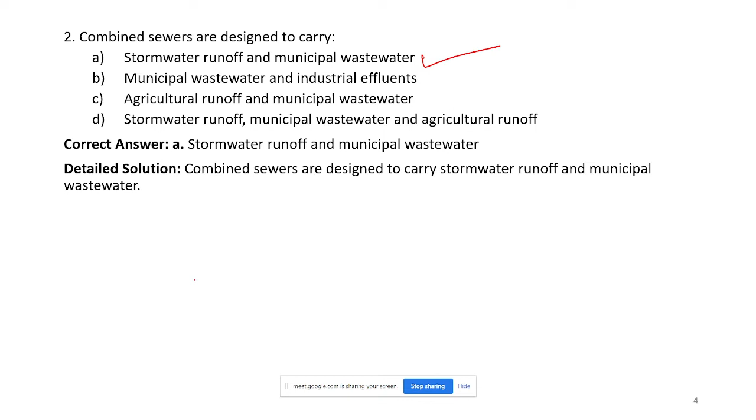Very good. Because, see, there are two types of sewer networks, and I think you would have learned about this in the lecture videos. You have combined sewers where two types of flows are there: stormwater runoff and municipal wastewater.

So when we design a sewer network to incorporate both stormwater and municipal wastewater in a municipal region, that is known as combined sewers.

So anyone know what is the other type of sewer network which we have other than combined sewers? Separate sewers. Yes, that is correct. So other than combined sewers, we also have systems designed separately to incorporate municipal wastewater as well as stormwater. So these are the two types of sewers.

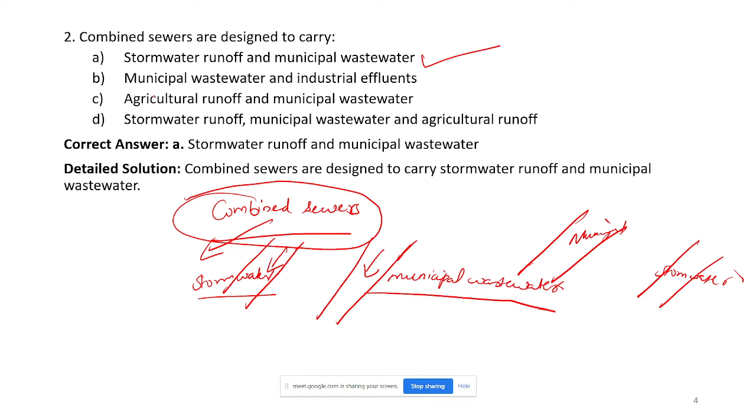So what are the other options? Option B is municipal wastewater and industrial effluents. But industrial effluents, when we take it, there is a possibility that these could be discharged into the sewer lines, but in effect it is not considered as a separate parameter for the design.

So for the design we consider two types of wastewater, stormwater runoff and municipal wastewater, and if it is going in a combined system it is called combined sewers. Similarly, agricultural runoff could also go into the sewer lines, but as engineers when we design, we basically consider these two types: stormwater runoff and municipal wastewater. I hope it is clear for you. Let us move on to the next question.

Ma'am, there is a doubt. In many textbooks, there is a saying that stormwater and agricultural runoff are both the same. They have taken both together, and sir has taught they are separate. Separate, yes. So I will tell the reason.

See, stormwater runoff means if you have a municipal region and it is a rainy season, a wet weather season, the runoff from that region is called stormwater runoff. But agricultural runoff need not be in a wet weather season. It could be a dry weather season also.

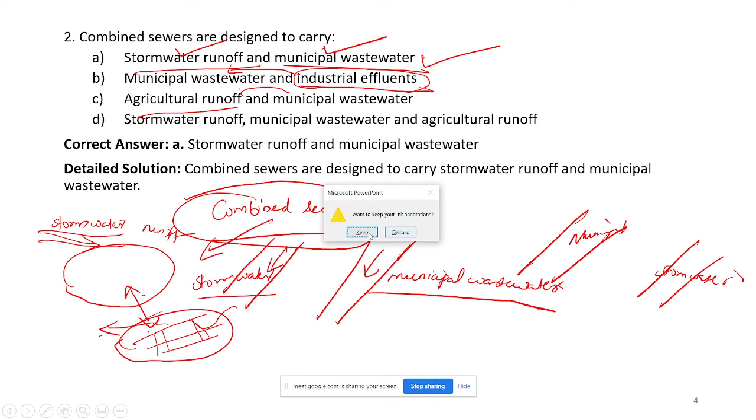Let us come back to the third question. Which of the statements are true? A, dry weather flow depends on weather conditions and infiltration in the sewers. B, dry weather flow undergoes fluctuations. C, combined sewers carry stormwater runoff and municipal wastewater. D, all the above. So, any answers, any guess?

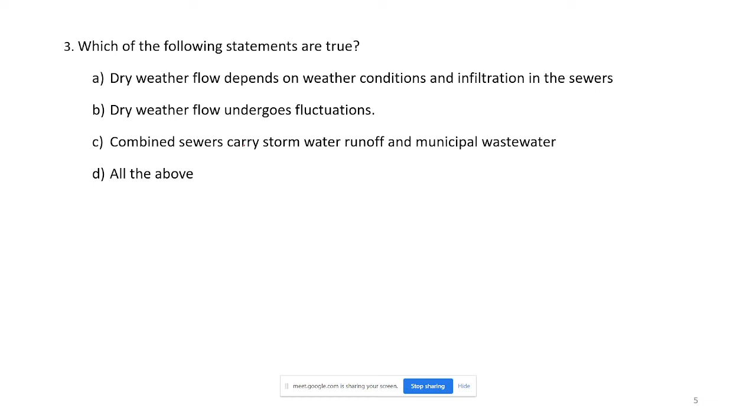Option D, ma'am. Option D, which one? Option C. Option C, okay. Let us see the answer first. The correct answer is option D, all the above. The question is which of the following statements are true. So let us see the first option.

Dry weather flow depends on weather conditions and infiltration in the sewers. This statement is correct because when it is not a rainy season, whatever flow is coming through the sewers is known as dry weather flow. So obviously it depends on the weather conditions, and there could be some infiltration into the sewers which we should account for. You have learned about infiltration in the additional flows into the sewers topic in the week 2 lectures. So this statement is true.

Option B is dry weather flow undergoes fluctuations, which is also correct because based on the use pattern, the characteristics of the population, the variations in the infiltration, everything, dry weather flow can undergo fluctuation. So this statement is also correct.

Option C is combined sewers carry stormwater runoff and municipal wastewater. That is a true statement; we have seen it in the last question. So all the statements are true, and the answer is D, all the above. I guess it's clear for you now. So let us see the next question now.

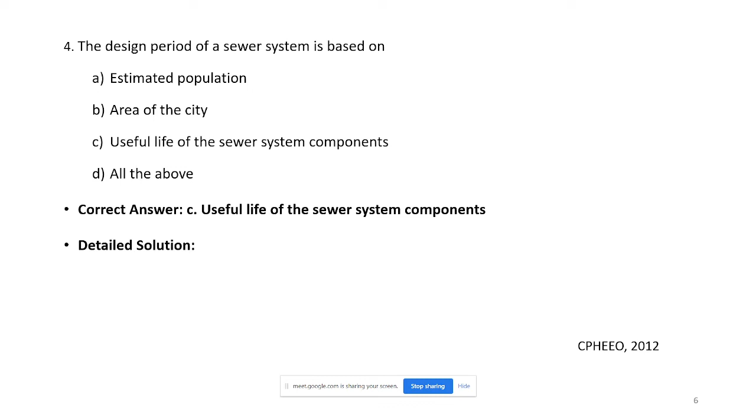The answer is option C, useful life of the sewer system components. Let us see why. We have seen in the lecture that for designing a sewer system, the most important parameter is the useful life of the sewer system components. Design period is always based on the life of sewer components.

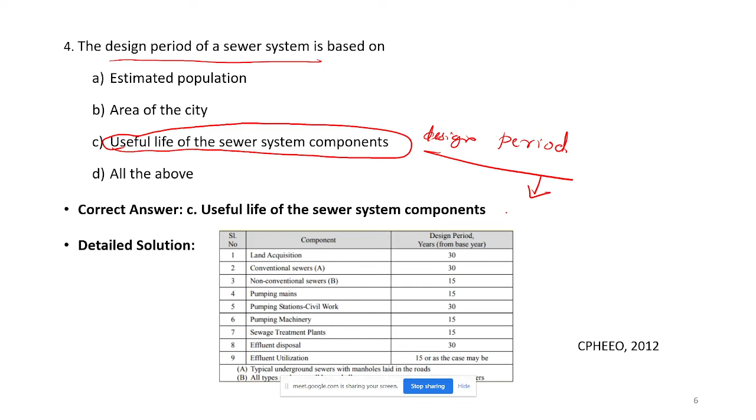The CPHEEO manual has given a table, also in your lecture notes, giving the life period of different sewer components. Based on these values we decide the design period of a sewer system.

The area of the city and the estimated population come into the picture when we design the quantity of sewage to be treated in the treatment system. The design period is always based on useful life of the sewer system components. I hope it is clear now. If you still have a doubt, kindly refer to the lecture notes.

As well as, there is a separate, I think lecture 2 or 3, in which the professor has discussed the design period of a sewer system. So any doubt on this?

Ma'am, what is the life of a sewer pipeline? Sewer pipelines, that I am not sure about now. I guess it is also given in this manual, so you can refer to this. Otherwise, I will clarify it in the next class. Okay, ma'am. It's all based on the manual; this manual is what we follow for knowing the life period of different components.

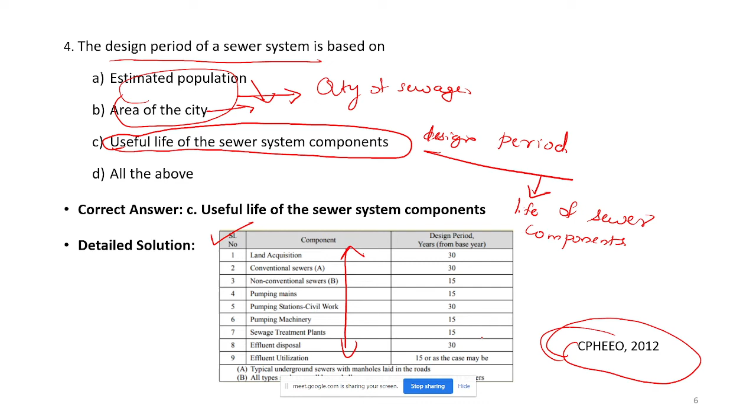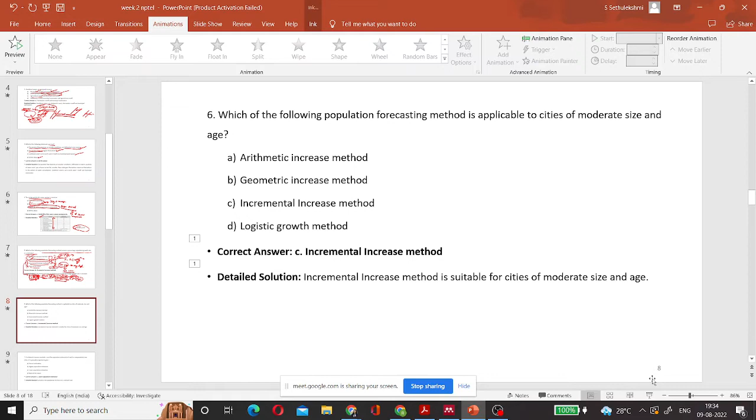Next question is which of the following population forecasting method is applicable to cities of moderate size and age? Option A, arithmetic increase method. Option A, ma'am. Let's see all the options. Option B, geometric increase method. Option C, incremental increase method. Option D, logistic growth method. You have said option A, right? Anyone else? Any other answers? Let us see the answer.

It's option C. Option C is the correct answer. For cities of moderate size and age, it is incremental increase method. Option A is correct for old and established cities where there is not much scope of further expansion. As we have discussed, option B is for new cities. Option C for cities of moderate size and age.

In the example, the professor solved one problem with these three methods, and we have seen that option A gave the smallest prediction, and option B predicted population at a very high scale, and option C, with incremental increase method, the value was in between. So this was seen in the example problem solved in the lecture video. So I guess it is clear for you now. So is there any doubt?

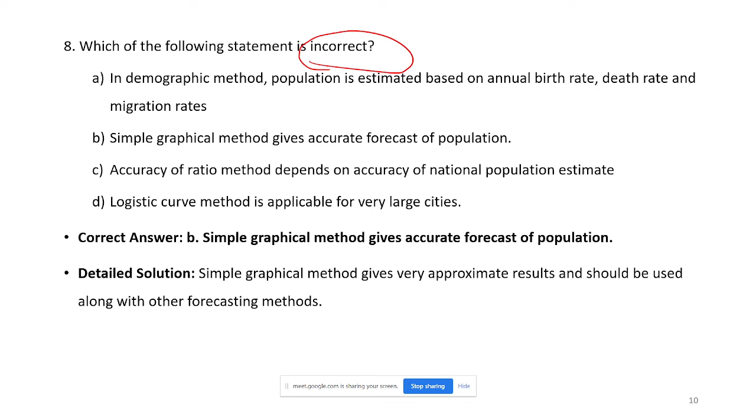Which option is incorrect? B. Option B. Any other lead? Anyone? Option B, madam. Option B. Okay, let us see the answer. Option B, yes, very good. Option B is the correct answer. Simple graphical method does not give accurate forecast of population.

You would have seen how the simple graphical method works. If not, kindly refer to your lecture video and lecture notes and see how they are interpreting the data and how we are predicting the population based on the simple graphical method. So this method does not give accurate forecast of population. It gives very approximate results and should be used along with other forecasting methods.

So I hope it is clear for you. Is there any doubt? Is there any doubt? No, ma'am. If not, let us see next question.

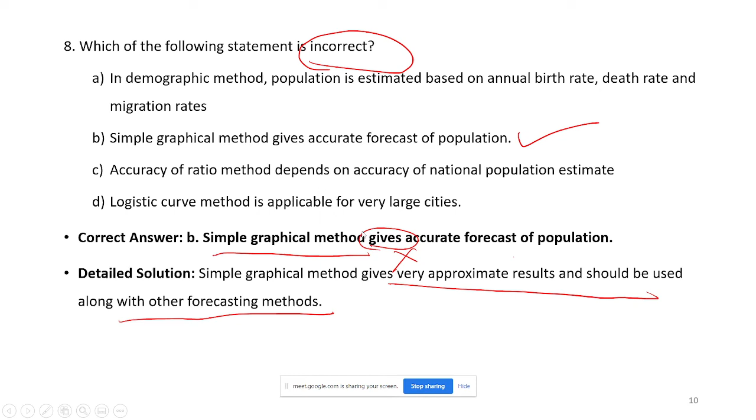Meanwhile, let me admit some of your friends again. Sorry for the interruption. Let us see the next question.

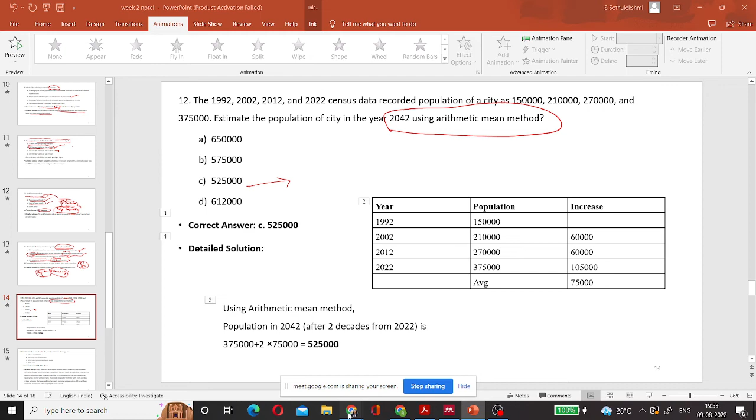Okay, let us see the answer now then. I hope you would have done it by now. Option C is the correct answer. Very good. So let us see the detailed solution. So you have for year 1992, 2002, 2012 and 2022 the population given, and I will explain how this method works.

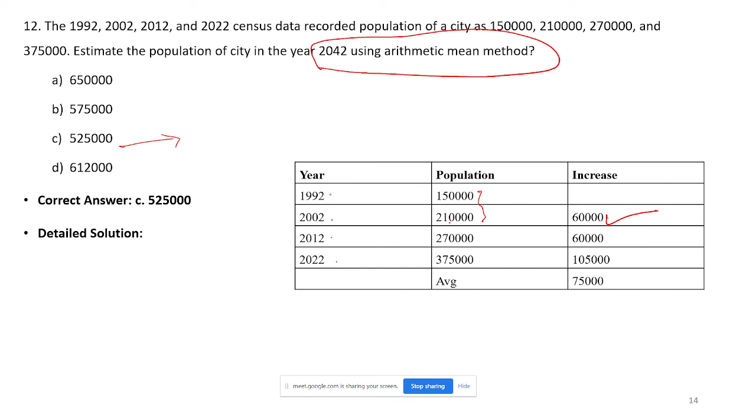So what you have to do is, from 1,50,000 to 2,10,000, the 60,000 is the increase. Then from 2,10,000 to 2,70,000, again 60,000 is the increment. Then you consider these two, and here 1,05,000 is the increment from the year 2012 to 2022.

So in this method, after calculating the increment from one year to another, or from one decade to another, you will have a table of increments, and from this you have to calculate the average. So this 75,000 is the average of these three. Then once you get this average, you have to calculate the population in 2042.

2042 means the latest data is available for the year 2022. So 2042 is 2 decades after 2022. So what you have to do is take the population in 2022 plus 2 into this average value 75,000. So that gives the answer 5,25,000. Hence, option C is the correct answer.

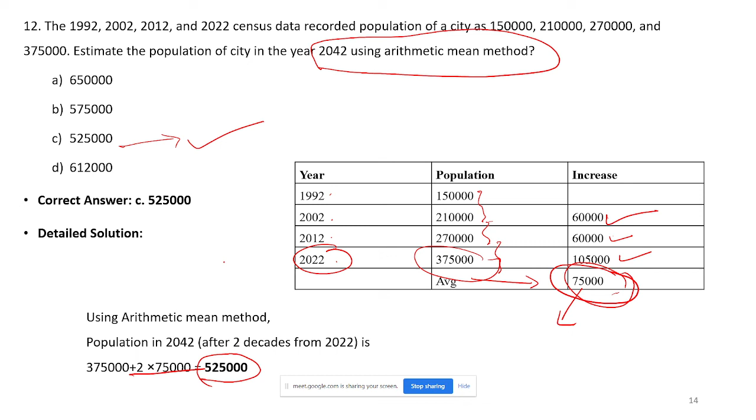So this is what I have said. In the arithmetic increase method, the population growth is considered as a constant. So this is the 75,000. This method assumes that the 75,000 increment will be there after each decade. So this is how this method works. I hope it is clear to you now. If there is any doubt, you can ask. If not, let us see the next question.

Next question is a theoretical question. Additional inflows considered in the quantity estimation of sewage are: A, inflow due to infiltration; B, inflow from commercial institutions; C, inflow from unaccounted private water supplies; D, all the above. Any guess? Option A, ma'am. Okay. Any other answers? Option B, madam. Okay. Any other guesses?

Okay, let us see the answer. D. Yes, option D is the correct answer. You would have seen in the lecture video that while estimating the quantity of sewage, other than what we have estimated based on the design population, there could be other inflows into the sewer lines which should be accounted for while designing the sewer network. So let us see what the additional inflows are.

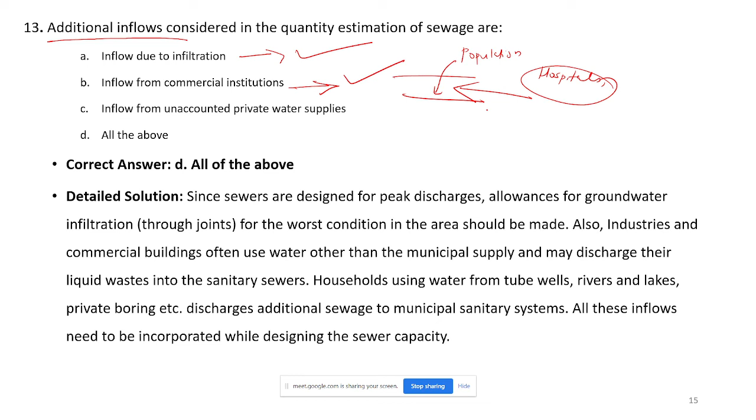Inflow due to infiltration, obviously it would be there. The second option is inflow from commercial institutions, like hospitals, schools, etc. Those things have to be taken care of, so that is also there. Then inflow from unaccounted private water supplies, which means that, suppose in a municipal region, we know the quantity of water which we are giving into the municipal area.

Some of the residences would be using bore wells or something else to get more water, so allowances for groundwater should be there. These things should be accounted for while estimating the quantity of sewage. Hence, all these three are correct, and so the answer is D, all the above. So, any doubt?

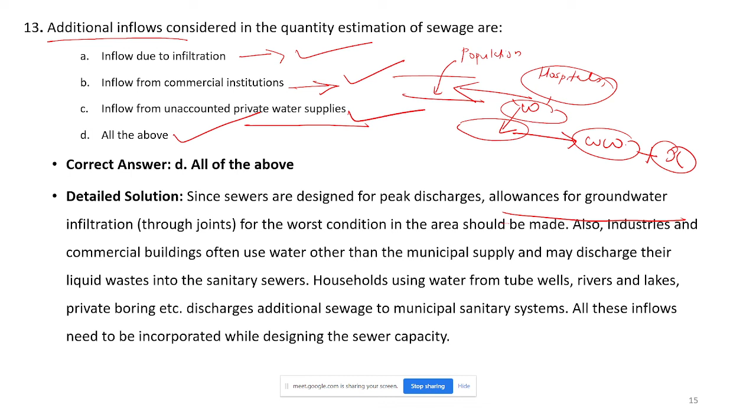Any doubt, anyone? If not, let us move on to the next question. So the next is a problem. I expect all of you to do this problem now and say the answer.

The question is, if the development plan rules of a city provide following reservations for different land uses: roads 14%, gardens 12%, school 4%, and markets 3%, calculate the population density per hectare for the plan. Assume floor space index as 0.5 and floor area as 12 meters square per person.

Option A 119, option B 289, option C 279, option D 256. So you have to estimate the population density per hectare for the plan. I hope a similar numerical was solved in the lecture video. So all of you please solve it now and say the answer. I'll give you a few minutes.

Option A 119, madam. Option A 119. Okay, any other answers? Any other answer, anyone?

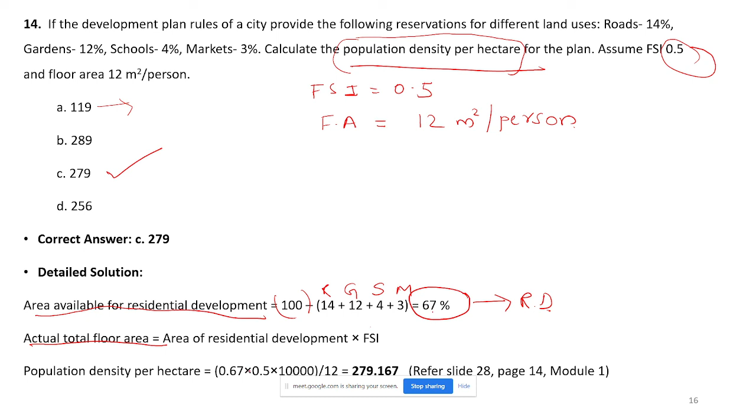Total floor area available for residential purpose: even though 67 percentage of the total area available is for residential development, we have to consider the floor space index for actually building the residential area. So we need to multiply the floor space index with this 67 percentage. So 0.67 into 0.5 is the actual total floor area available for residential development.

So we have been asked to know the population density per hectare. We know that 10 raised to 4 meter square is 1 hectare. So 0.67 into 0.5 into 10 raised to 4 is the total area available, in meter square, for this residential development purpose in 1 hectare.

And we are told that floor area of 12 meter square is occupied by one person. So we have the total area available as 0.67 into 0.5 into 10 raised to 4. This much area is there in our hand for residential purposes, and we know that 12 meter square area is occupied by one person. So this area divided by 12 meter square per person comes to around 279 persons per hectare.

1 hectare is equal to 10 to the... sorry, no, 1 hectare is equal to 10 raised to 4 meter square. 1 hectare is considered to be 10 raised to 4 meter square.

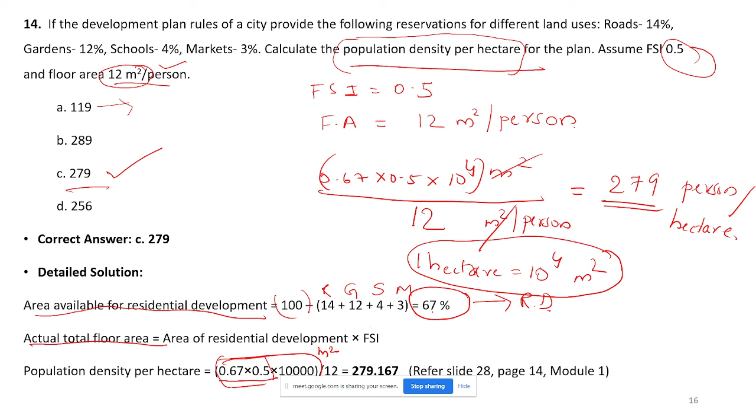The last question is: average annual daily sewage flow of a city is 115 MLD. The maximum hourly flow of the city, assuming daily and hourly peak factors as 2 and 1.5 respectively, would be: option A, 12,500 meter cube per hour; option B, 17,525 meter cube per hour; option C, 14,375 meter cube per hour; option D, none of the above.

So I would want everyone to try this problem and quickly tell me the answer.

Option C, madam, 14,375 meter cube per hour. Option C, okay, very good. Let us wait for others also. Any other answer, anyone?

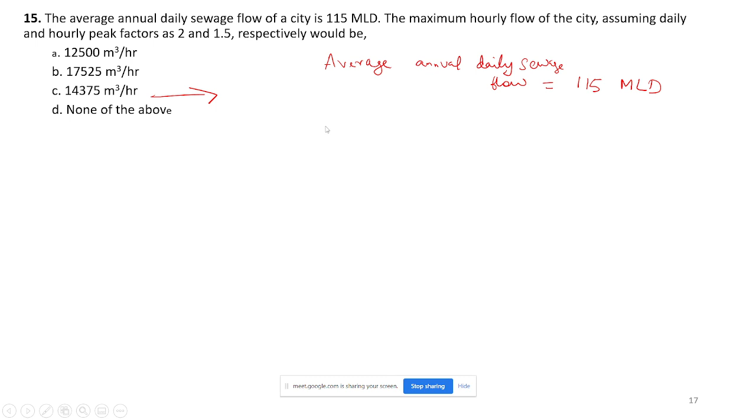There is no other way. Let us see the answer. Option C is the correct answer, which you have said, which is correct. Very good. Thank you, madam. Let us see the answer.

Maximum hourly flow is based on the rule of thumb discussed in the lecture notes: maximum hourly flow is 3 times average annual daily flow. The factors are also given here, 2 and 1.5. So 2 into 1.5 into 115, where 115 is the average annual daily sewage flow, which comes around 345 million liters per day.

You have to be careful with the units here. Million liters means 345 into 10 raised to 6 liters per day, but you need the answer in meter cube per hour. So it's just a conversion: into 10 to the power 3 meter cube per day. 1 day is 24 hours, so 345 into 1000 by 24 meter cube per hour, which comes around 14,375 meter cube per hour.

This rule of thumb is given in slide 30, page 15 of module 1 lecture notes. So basically, the average annual daily sewage flow, as a rule of thumb, multiplied by 3, will give you the maximum hourly flow. The 3 is coming from 2 into 1.5, which is already given as the daily and hourly peak factors, 2 and 1.5.

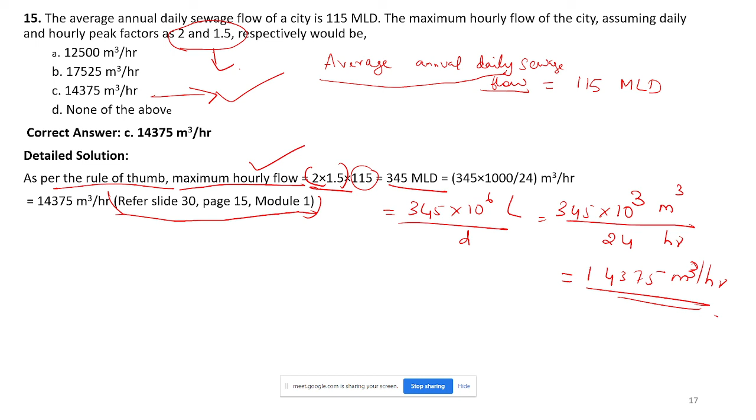I hope all the questions discussed till now in this session will be helpful to you for solving the assignment problems of this course, as well as for the final exam. These questions are developed based on previous year questions, previous year assignment questions, exam questions, and also the lecture notes. So this will be useful for solving assignment questions and also any other competitive exams you will be writing. I hope the session will be useful to you.